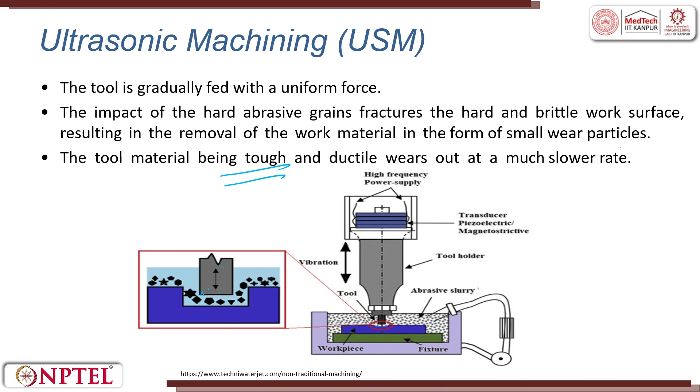So the slurry can be recirculated, put through a filter and then recirculated. The mechanisms can be hammering of the abrasive particle on top of the workpiece, or impact of free abrasives.

So this is whatever I said, the tool moving down. The other way around, there are free abrasives which keep coming, hitting the surface and going. The load need not be happening here, because they are random in nature. When the tool moves up, still the abrasive slurry can be flowing down. So the impact of free abrasives on the workpiece can lead to removal of material.

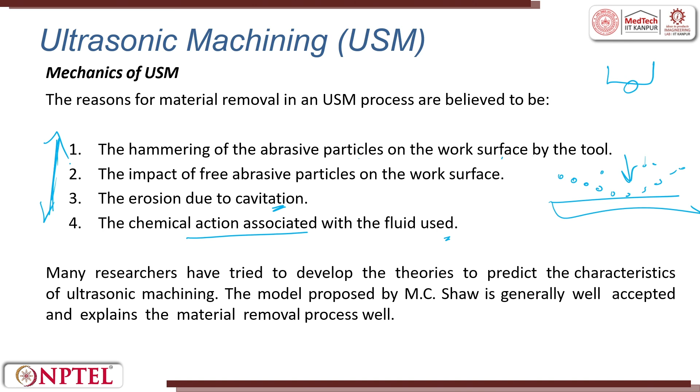Cavitation, as I told you, when the ultrasonic creates up and down motion, it can create bubbles. These bubbles have very high local pressure. When it explodes, it tries to remove material. There can be a small chemical action with the fluid, which is almost negligible. So these three are very important material removal mechanisms as far as ultrasonic machining is concerned.

M.C. Shaw made a model. I am just presenting this model to understand what will be the material removal rate, and who are all the key players in the material removal rate as far as ultrasonic machining is concerned.

There are assumptions made while making the model by M.C. Shaw. The rate of material removal is proportional to the volume of material per impact. So what he says is, the rate of material removal MRR is proportional to the volume of material per impact, that is, one abrasive impact. So when I know in one slurry how many abrasives are there, I multiply it, and then I say the rate of workpiece material removal is proportional to the number of particles making impact in a cycle.

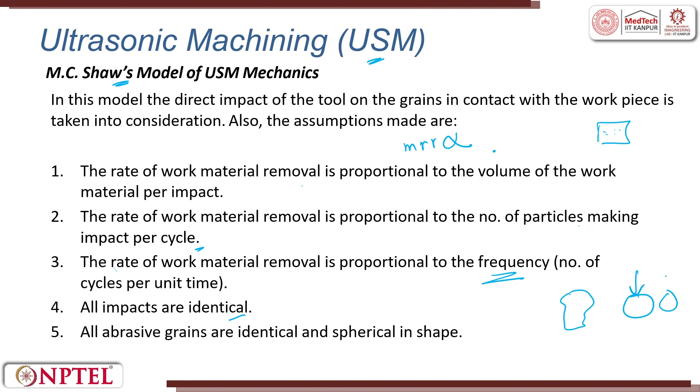So this is what I said here, the rate of material removal is proportional to the frequency, how many times I hit. All impacts are identical, all abrasives are identical. Because the abrasives are random in nature, I cannot do it directly, so what I do is I make every abrasive spherical, and the impact that happens on one abrasive also tries to happen on the other abrasive, the same impact.

So by making all these assumptions, I am able to calculate the volume of material removal rate Q. Q is directly proportional to the volume of material removal per impact, V, and Z is the number of particles present there, and nu is the frequency.

By multiplying this, I know per impact what is the amount of volume removed. Then I know how many abrasives are there in one impact, abrasives in one impact. So what does it mean is, you have an abrasive, we are currently taking one, but there can be five. So the number of abrasives per impact per cycle, then the frequency is how many times I do it. By multiplying all these things, I can try to find out the volume of material removal.

The proportionality can be removed by introducing a constant K. That constant K represents the workpiece, tool material, and abrasive material interaction.

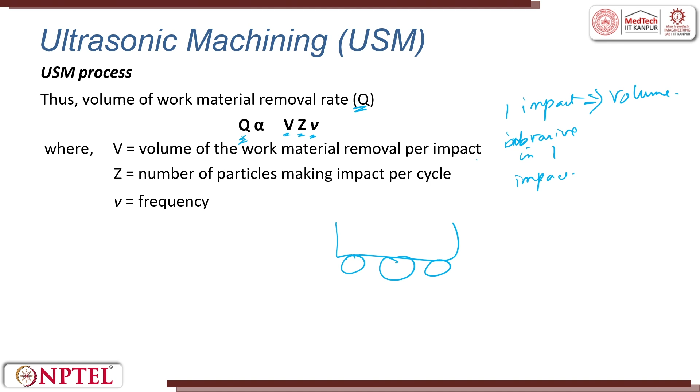So as I said earlier, for the mechanism of material removal, you can try to have a position A, which is the mean position, indicating the instant the tool face touches the abrasive. The tool moves from C position to B position, the tool moves from C to B, that is every cycle, it moves from C to B. So when it comes to a mean position, the mean position is between C and B, halfway is O.

Halfway is O. At position A, the abrasive comes in contact with the tool. So now you can clearly mark C, O, A and B. This is the amplitude, this is the mean, and this is the point when contact happens with the workpiece. From the mean position to the O position, the total time, C to B and back to C, is t.

Now, when I move from O to B, it is t by 4. I do not know the exact position where A will come in contact or the abrasive size; we are assuming it to be the same, but in reality there can be a change. So the time taken to move from A to B is delta t. The period of movement from A to B represents the impact, so the impact time is delta t.

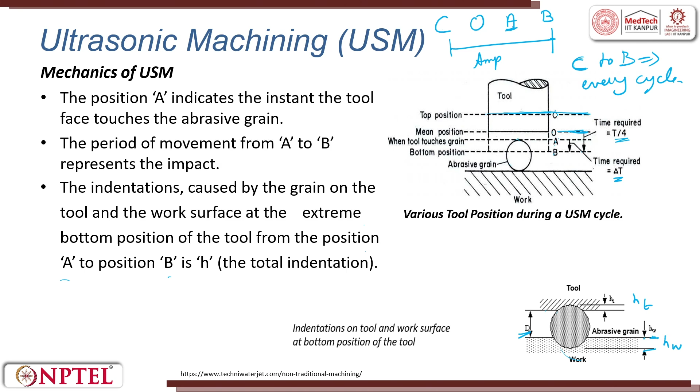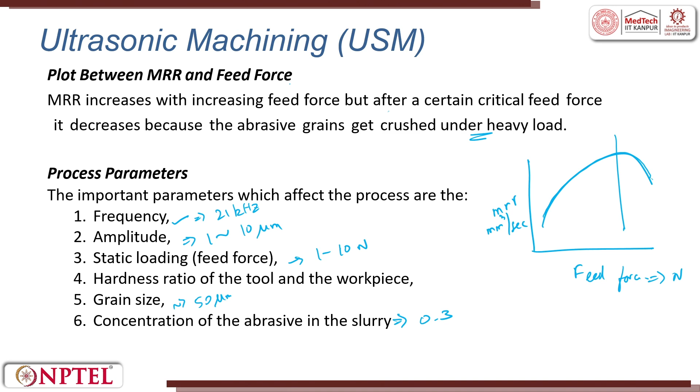So these are the process parameters and these are the values generally used for ultrasonic machining.

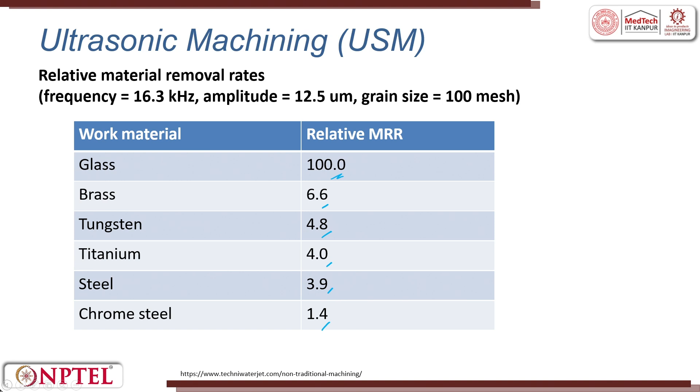When we try to have a relative material removal rate, taking glass as 100, brass has a material removal rate of 6.6, tungsten is 4.8, titanium is 4, steel is 3.9, and chrome steel is 1.4. So compare these to glass to see the material removal rate.

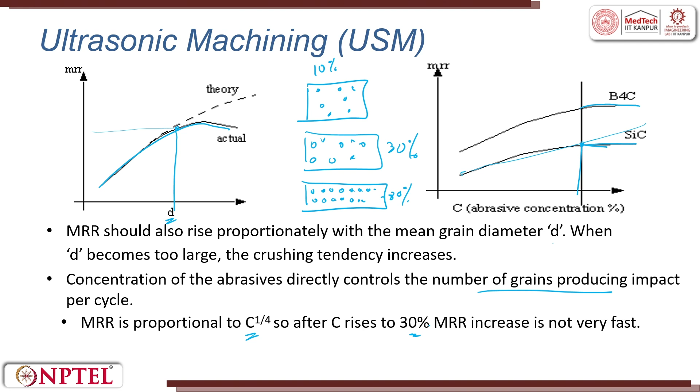The MRR is proportional to C to the power 1 by 4. So after C rises to 30%, the MRR increase is not very fast.

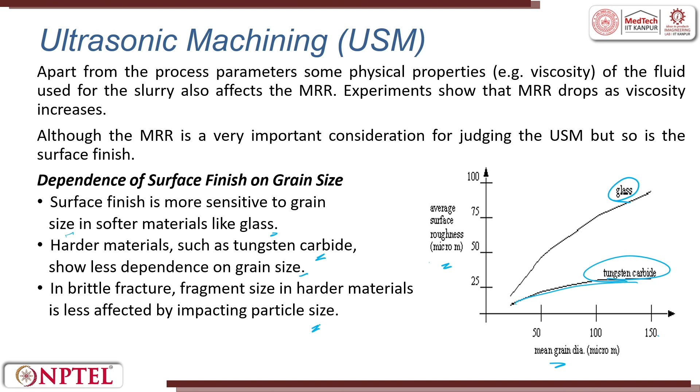Depending upon the surface finish, it is more sensitive to grain size in softer materials like glass. Harder materials like tungsten carbide have very less impact. The brittle fracture fragment size in harder materials is less affected by the impact of particle size.

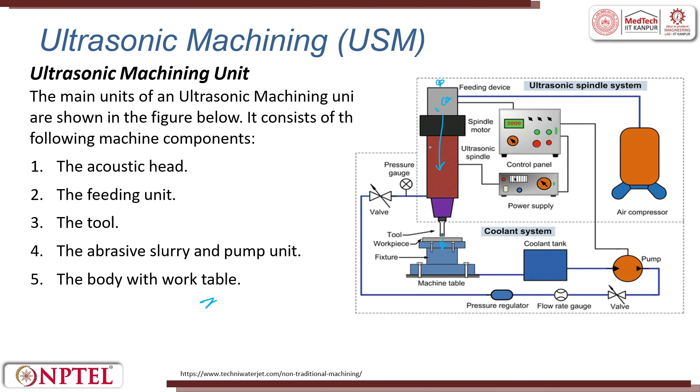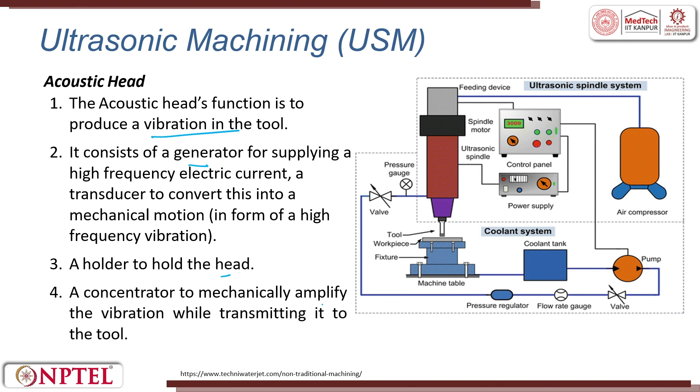The acoustic head is used to produce the vibration; it has a generator, a holder to hold the head, and a concentrator to mechanically amplify this. So we are talking about the horn. There are various types of concentrators, I call it a horn, you can also call it a concentrator.

There are stepped concentrators, exponential concentrators, and conical concentrators. The exponential concentrator is the best, but manufacturing difficulty is there, so we always go for a tapered one. The horn which is used is always taper, and it is used for multiplying or amplifying the amplitude.

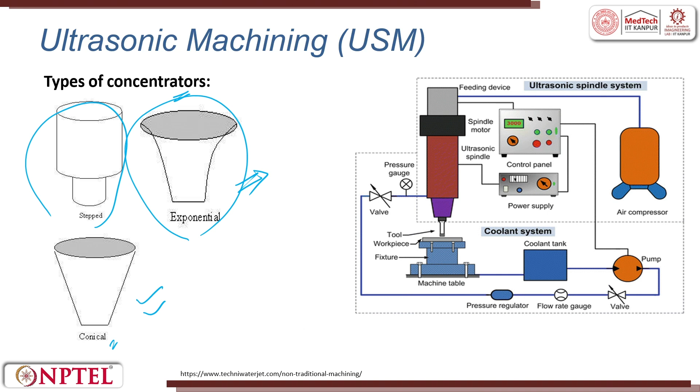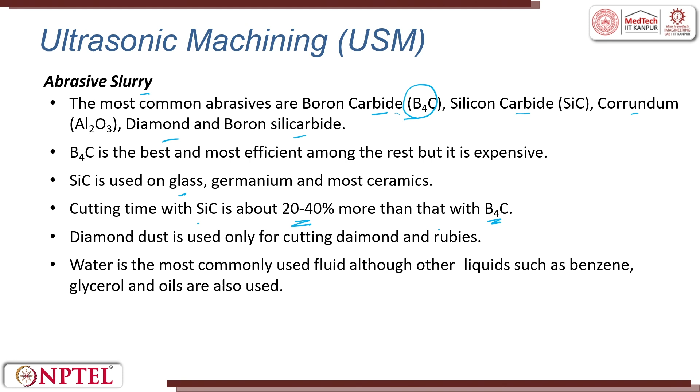So we use boron carbide as the material here. Silicon carbide is also used on glass. The cutting time with silicon carbide is about 20 to 40% more than that of B4C. Diamond dust particles can also be used. Water is used for making the slurry.

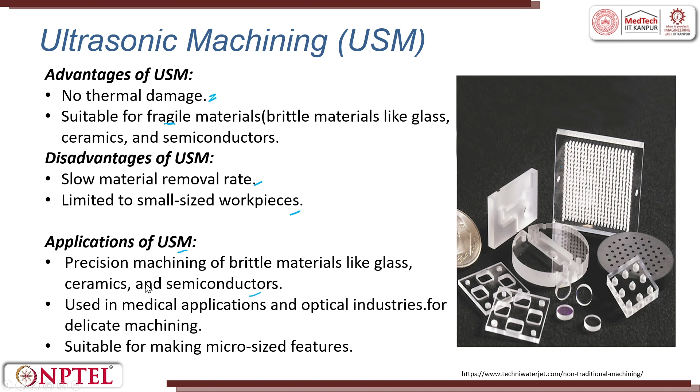What is the limitation? It is a slow process and is used only for small size workpieces. For large workpieces, holding and deflection issues come up. It finds a lot of application in optical industries, medical applications, and also micro size features.

The next process of interest is going to be chemical machining process. In chemical machining process, as I told you, we will try to have a chemical as an etchant, which is always acidic. This etchant is diluted with water and filled inside a tank.

That is called the chemical reagent. Now you keep the workpiece, and on top of the workpiece you apply a maskant, or a mask. This mask protects the material wherever it should not be etched.

In order to have continuous etching and prevent the slurry from depositing in the machined area, we use an agitator to create a vortex. This vortex disturbs the slurry material and removes it from the machining zone to the bottom. We can also have a heating element, which accelerates the etching phenomena.

Chemical machining is a unique non-traditional machining process that removes material through chemical dissolution, eliminating mechanical contact and tool wear. So there is no cutting force, meaning very fragile sheets can be made.

If you see a photo of Lord Krishna, they etch it, or a photo of Jesus, they etch it, and if you want to write some Quran words, they etch it. These are all done on very thin sheets, all done by chemical etching.

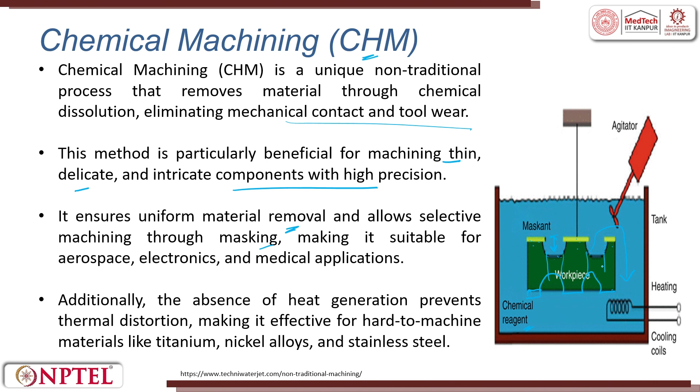Additionally, the absence of heat means there is no thermal damage to the workpiece. So what is the process?

The chemical machining process begins with a cleaning step where the workpiece is thoroughly cleaned, then a mask is applied if selective etching is desired, followed by the etching stage. Finally, once etching is over, the maskant is removed and the workpiece is cleaned to remove all traces of the etchant, so that corrosion cannot happen.

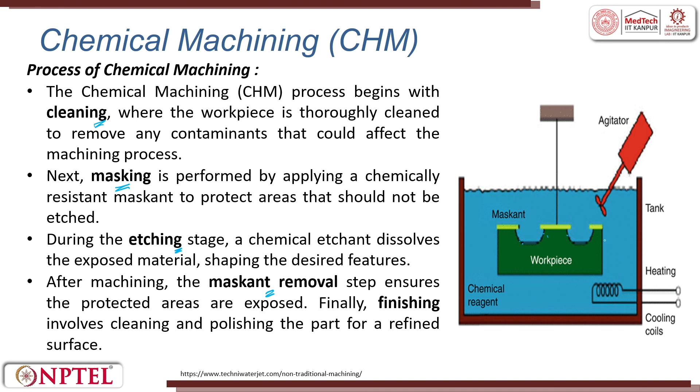Advantages: no mechanical stress, so you can machine complex and intricate shapes. It can do full machining, engraving on top, or create a taper. Work on hard, brittle and thin material can be done, and it is suitable for batch production.

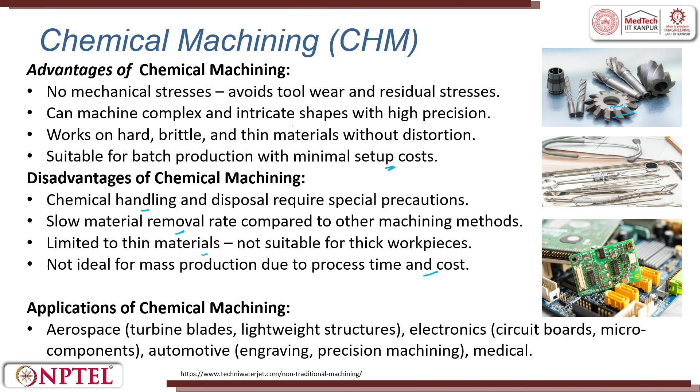Chemical handling is always a challenge. The material removal rate is slow, it's limited to thin machining, and it is not ideal for mass production. Aerospace components, many transformer components, and very thin laminates are made using chemical etching.

Electrochemical machining is the next process, an advancement of chemical machining. I wanted to accelerate the machining process, so here what I do is attach it with electricity. Electrochemical machining is an advanced non-contact machining process based on electrolysis, functioning as the reverse of electroplating. There, it was only etching; here, electrolysis happens.

In plating, what happens? You have an anode, and material is removed from the anode and deposited on a cathode. While depositing, I do not allow this to deposit - I remove the material off. So material is getting removed from the anode, not deposited on the cathode, and I move the electrolyte out. That is electrochemical machining.

Material removal happens through ion movement in an electrolyte, ensuring uniform material dissolution without mechanical stress - this is electrochemical machining. Here you use a tool called a cathode, and attach the workpiece to the anode. You give the tool whatever profile you want. Based on the tool profile and the distance maintained, the current density changes, and the amount of electrolysis and material dissolution that happens changes accordingly.

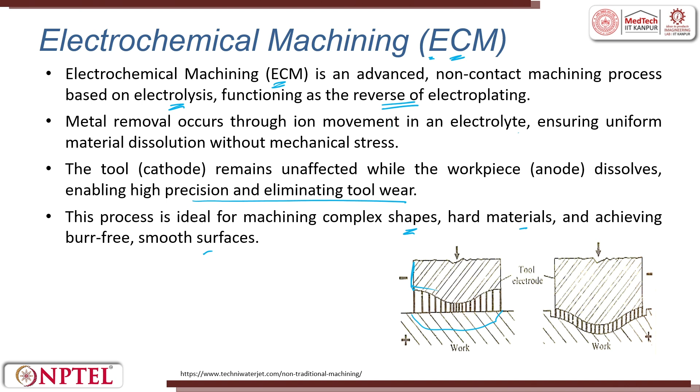You can use it like sinking, or you can use it like milling. That means, like in a milling operation, I have a tool, I rotate the tool and move the workpiece in the XY plane. You can try to make a pocket. So the advantage of this process is there is no heat and the surface finish is extremely good.

In electrochemical machining, the dissolution rate is higher when the gap is smaller. Basically it depends on the current density, and it is an inverse relationship between the current density and the gap. So this is negative, this is positive, and what we are trying to talk about here is the gap.

Depending upon the current densities, the material removal rate will change as and when the tool moves down. If you keep it at one point, the etching will happen and then stop, so I have to keep moving the tool - a feed rate is given. As the tool moves downward, the workpiece surface gradually takes the tool shape, achieving a uniform gap at steady state.

High pressure electrolyte is used such that very small gaps can be maintained while material removal can still happen. Very large currents will be used, current densities will be phenomenally high, and the voltages will be small.

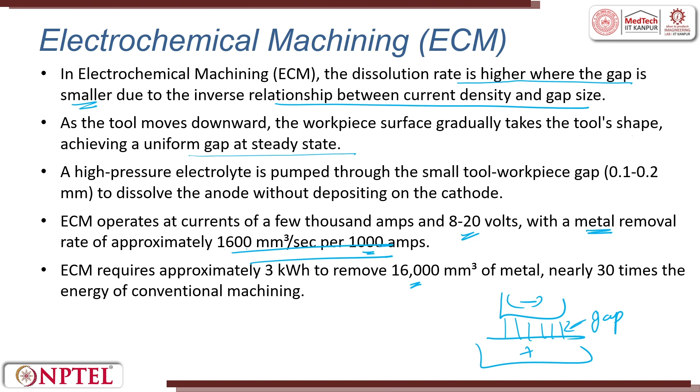So this is how the process looks like. I give a constant feed from the top - this is the tool. The tool does not come in contact with the workpiece, and there is no maskant used. The tool has to be a conducting material, and whatever profile is on the tool will be replicated on the workpiece. The tool is given negative potential, the workpiece is given positive potential, and the tool can rotate and move in the XY plane.

Now, in the entire setup, the tool, the workpiece, and the stand - everything is sunk inside an electrolyte. This electrolyte can be acidic, neutral, or basic.

So what do I do? I try to take NaCl and mix it up with water, maintaining some mole percentage, and then fill up the electrolyte. I can also take HCl, or HNO3, depending upon the workpiece-tool combination you choose. So now, in the presence of the electrolyte and Faraday's principle coming into existence, there will be a material removal rate which happens.

The feed is given from the top. The electrolyte is pumped inside through the power supply setup, and then it is also removed from here. We maintain a constant level, and whichever electrolyte gets removed passes through multiple filters that remove the sludge, and then it gets recirculated.

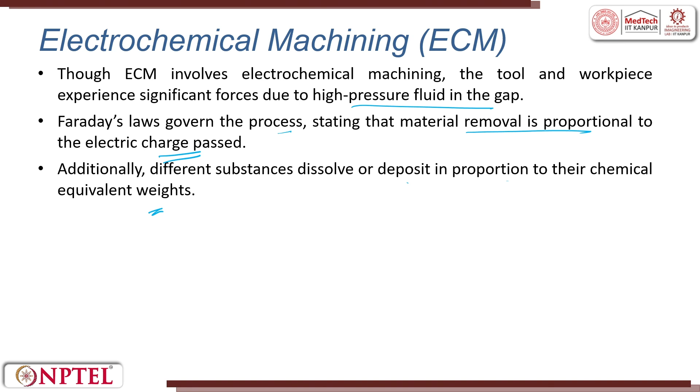Although ECM involves electrochemical machining, the tool and the workpiece experience significant force due to high pressure fluid in the gap. Faraday's law governs the process, stating that the material removal rate is proportional to the electric charge passed. Additionally, different substances dissolve or deposit in proportion to their chemical equivalent weight. So these are the advantages.

Extremely hard materials can be removed, no tool wear, it is faster than the conventional machining process, you can get up to 25 microns accuracy.

The disadvantages: since it is reacting and there is a dissolution happening, the maintenance of the equipment is very hard. The electrolyte solution has to be constantly maintained.

You should also understand when the current passes through a liquid, there is electrolysis happening. So the water will get evaporated. Once the water is evaporated, the concentration level goes high. In order to maintain it, we always keep on adding water.

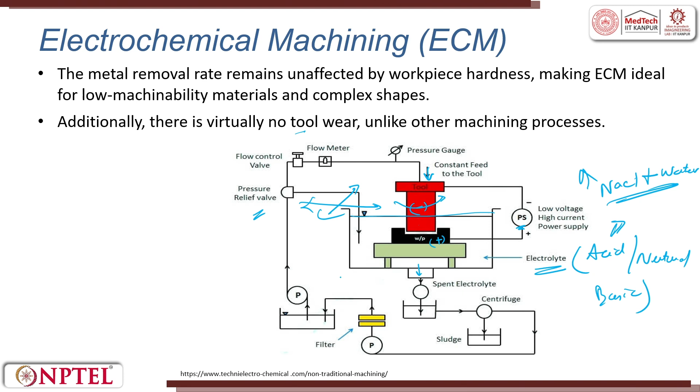Steady voltage potential is required, because when you apply water and an electrolyte there, it is going to make H plus and OH. So this H plus is hydrogen.

If hydrogen is liberated at the tool surface, then it is possible to suffer from hydrogen embrittlement of the surface, because water dissociates and produces hydrogen. This hydrogen can enter into cracks, and these cracks, while in service condition, can lead to damage. So this is a disadvantage which happens in this process.

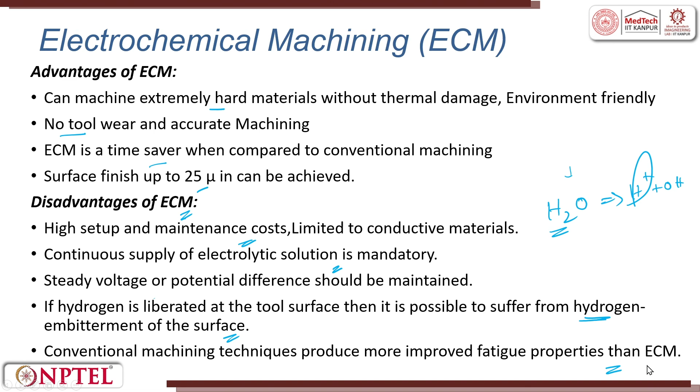So because of that, the fatigue property is always a little compromised when we use the electrochemical machining process.

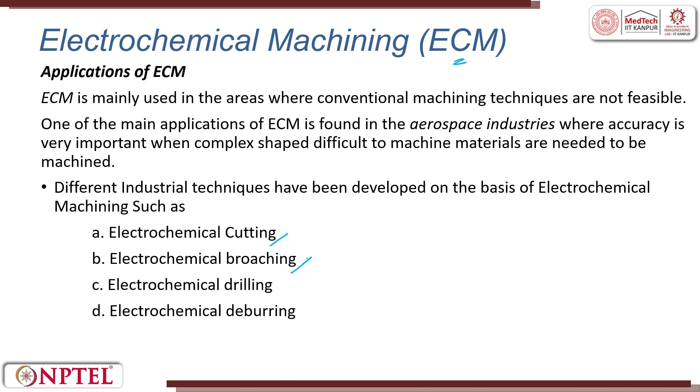The same electrochemical machining process can be used for electrochemical cutting, broaching, drilling and deburring. You can see here such parts when they are machined by electrochemical machining process. Turbine blades can be made, thin slots have been made for roller bearings, and airfoil compressor discs are also made out of this process.

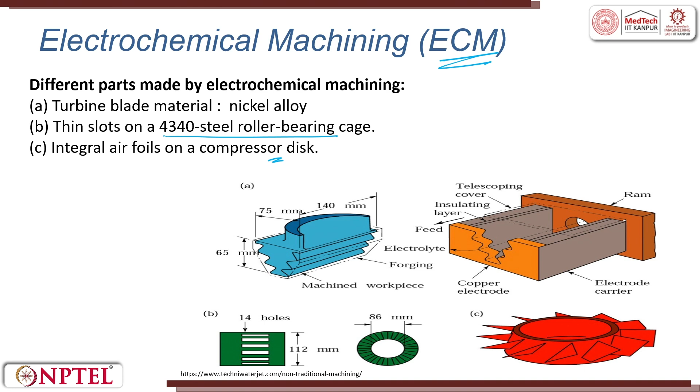So electrochemical machining is a very versatile process. As I told you, electrochemical machining can be used with cutting, broaching, drilling and deburring. We will try to show an example of electrochemical grinding.

Electrochemical grinding is a hybrid process which is a combination of electrochemical machining and conventional grinding. The material is removed through anodic dissolution assisted by mechanical grinding. So first dissolution happens, and the mechanical grinding removes the material.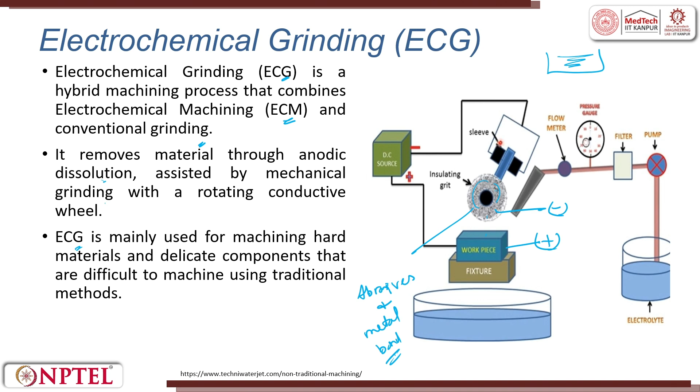So ECG is mainly used for hard materials, and delicate components are made out of the electrochemical grinding process. The setup consists of a workpiece which must be electrically conductive, and a grinding wheel which is also conducting. So a metal bond is used, and the abrasives can be diamond.

Here ECM is used by dissolution process to remove material, and then we do the grinding process wherein the mechanical action removes the little bit of abrasives and the material. So grinding is mechanical, and we use both in combination, which makes the process very efficient.

The electrolyte system flows between the workpiece and the grinding wheel, facilitating electrochemical dissolution and debris removal. A DC power supply of low voltage, very high power is used. A pump is used for maintaining and filtration of the electrolytic system.

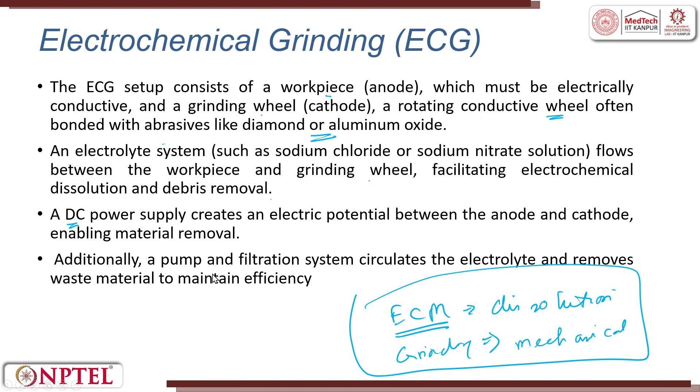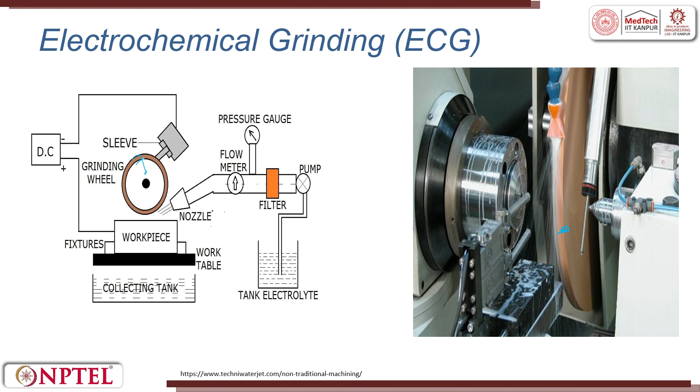So this is how it looks like in reality. This is the wheel, and then you remove it. So here is the wheel - the abrasives are not 100%. If you see here, it is bonded to a disc, so the abrasives are bonded in metal bonding.

No heat is generated. As I told you, hard and tough materials can be processed, no tool wear, free from burrs. The disadvantages are: initial cost is very high, only conducting material can be done. It can be slow in terms of material removal rate as compared to grinding, but many times it is also faster - this point has to be considered, it can also be higher on a need basis.

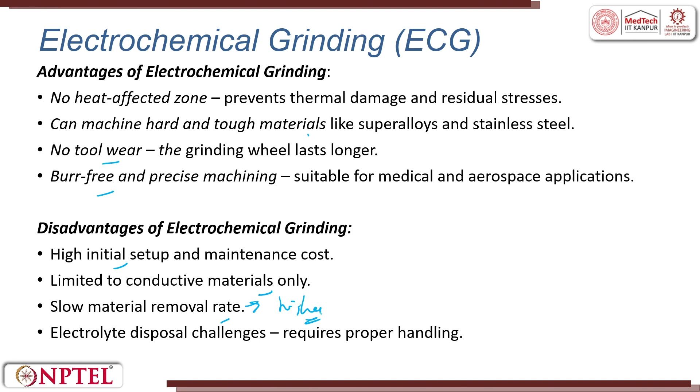Electrolyte disposal - so we have to be careful in handling it. Thank you very much.